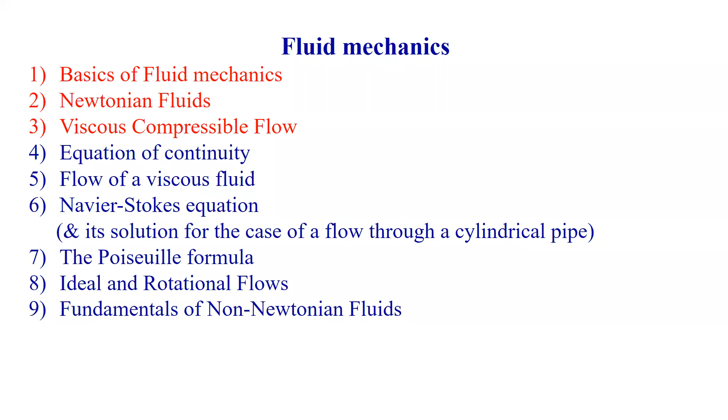What is fluid mechanics? What we discussed and came to a conclusion so far is that fluid mechanics deals with the study of all kinds of fluids under either static condition or dynamic situation. If we keep a fluid without motion, without movement, without pressure, or the forces acting on it from all directions conserved, the fluid is said to be static with reference to an observer, or it may be dynamic, moving from place to place, from time to time.

But fluid mechanics is a real branch of continuous mechanics. Continuous in the sense that properties are changing, dealing with the relationship between different forces acting on the fluid, different motion of the fluids because of various forces acting on it, and static conditions in a continuous material.

It also deals with, or refers to, many diversified problems such as surface tension, fluid statics - static in the sense it is not moving with reference to time, not moving with reference to the flow - flow in enclosed bodies or flow around bodies, either solid or otherwise, whichever shape you can expect under flow stability.

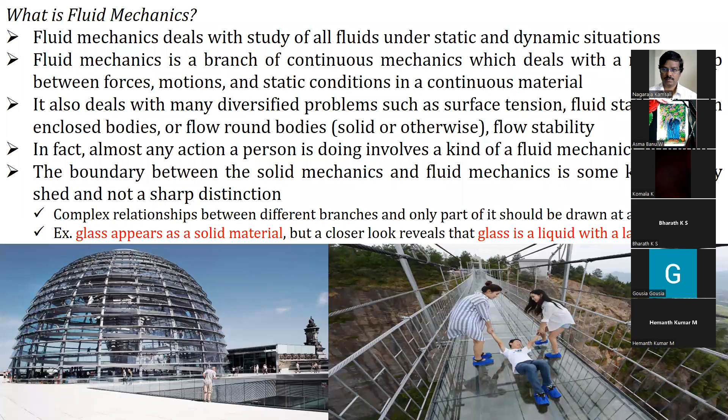A person was unable to move on that glass, afraid that he might fall. Even vehicles like cars and two-wheelers of known strength move on this, and this glass withstands that pressure and force at a great height of more than 500 meters, or a few hundred meters from the surface.

You may have watched this in a video or some social media, or heard that glass can be used as the toughest material. But glass is not an easy job to understand.

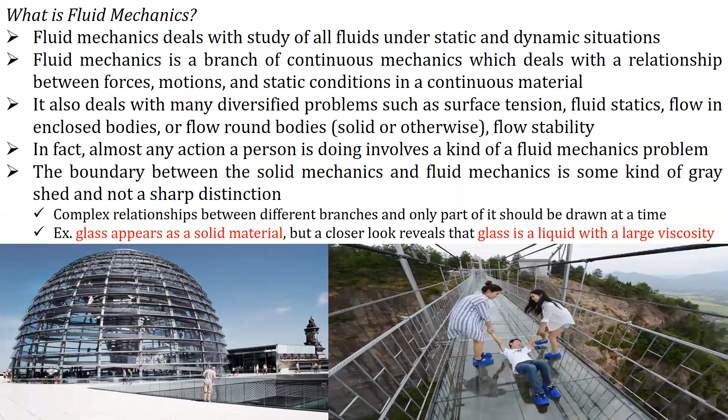How does glass behave, either as a liquid or a solid? There are several materials whose properties can't be understood by a fixed mechanism. Is glass a liquid? Yes, there is no doubt. At certain temperatures, glass behaves as a liquid.

Take the glass to a higher temperature and it converts to liquid, and by blowing that liquid you can make it into any desired shape of solid glass. The right path shows that glass is not a transparent material like an ice cube.

The right side picture shows the material of glass, solid glass. On the left side, it can take any shape - it is not simply deformed, but glass can take any shape through its deformation.

Pictures are better for understanding, but at the same time these may be complicated issues - it's not an easy job. The study of these mechanics involves many fields that have no clear boundaries between them.

You can take any examples or applications, entering any field, starting from the blood in a vessel to the plasmas in stars. You have to understand the relationship between fluid mechanics and their branches.

Researchers, scientists, and students at various levels classify flows into an orderly flow and a chaotic flow. If the flow is very orderly and systematic, it is called laminar flow. If the flow is not orderly, we call it turbulent flow.

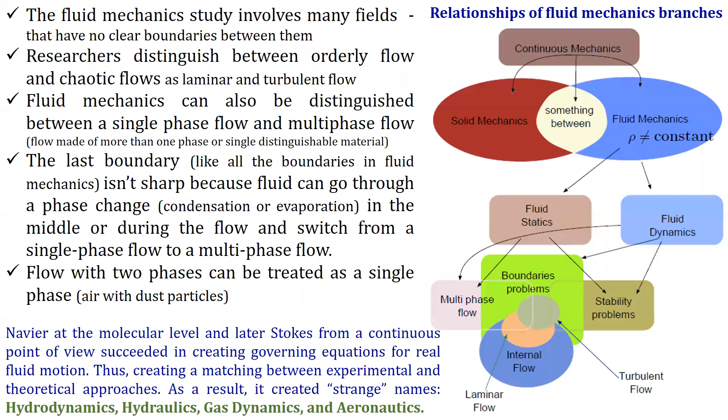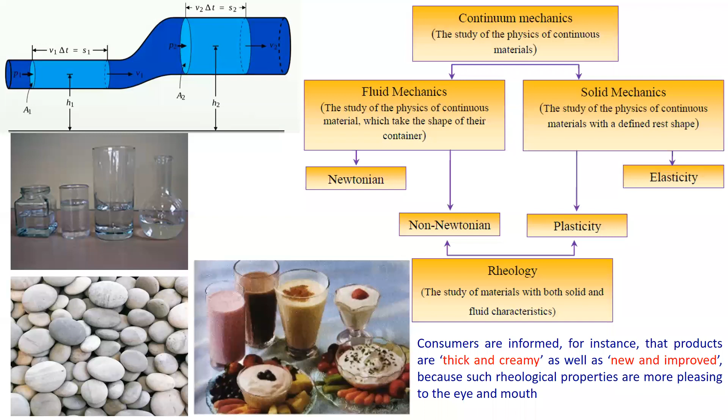There are several kinds of fluids, just going through that, don't worry, it's not an issue. Some differentiate fluid from solid by the reaction to stress. If you apply a stress and it gets deformed, it is a fluid, if not, it is a solid.

It is a known fact that fluid continuously and permanently deforms under shear stress, while solid exhibits a finite deformation. Of course, if you apply huge pressure, there may be some finite change that does not change with time. For example, if you have a cork ball, if you apply so much huge pressure, certainly it may change its shape.

It is also said that fluids cannot return to their original state after deformation, you may deform the fluid, but it will not come back to the original position, unlike plastics or elastic material. Maybe you have an eraser with you, you just press the rubber body and it will regain its shape. This differentiation creates a new material group that shows dual behavior, like particle behavior and wave behavior for electromagnetic radiation. This material will also show dual behavior under certain conditions, behaving like a solid in some cases, and like a fluid to a great extent in others.

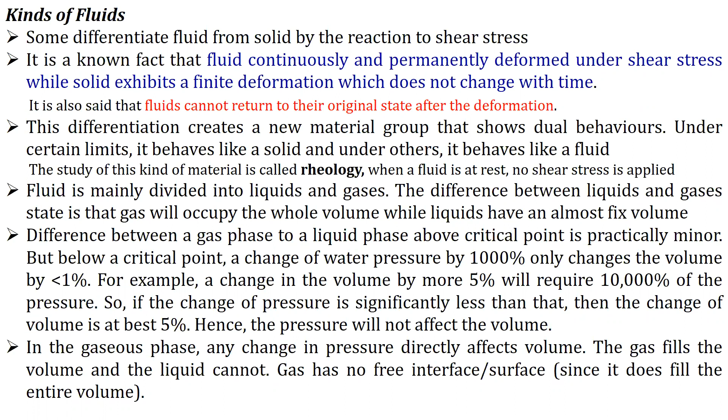In the gaseous phase, any change in pressure, even a small change, directly affects the volume. The gas fills the volume and the liquid can't fill the volume. Gas has no free surface or interface, but it does fill the entire volume, while the liquid will fill that. That's why fluids matter.

You might have witnessed it, or maybe heard, that people are walking on water, walking on a lake, walking on the ocean, walking on the seashore. On the seashore, there's no point on sand — people are walking somewhere else. That I will let you know in the next few classes.

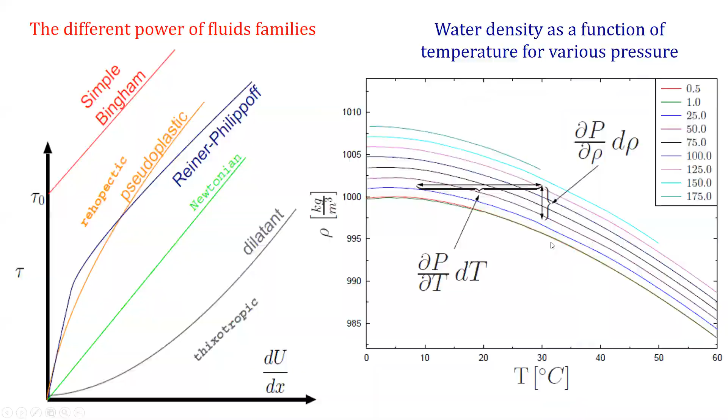Here you can't expect it to be almost linear, but you see how much gradient is expected. You also come across material with surface tension, which mainly depends on the properties of cohesion and adhesion. Cohesion means there should be an intermolecular attraction between the molecules of the same liquid — it enables a liquid to resist small amounts of stress. This cohesion is the tendency of the liquid to remain as one assemblage of particles.

Surface tension is due to the cohesion between the particles at the free surface. For example, if you take a capillary tube and dip it in water, the water rises on its own because of the surface tension.

But the liquid will never adhere to the substance in such a way. Adhesion means attraction between the molecules of the liquid and a solid boundary surface in contact with the liquid. This property enables a liquid to stick to the body.

Capillary action is due to both cohesion and adhesion, but it may not adhere. Surface tension is mainly caused by the force of cohesion at the free surface. A liquid molecule in the interior of the liquid mass is surrounded by other molecules all around.

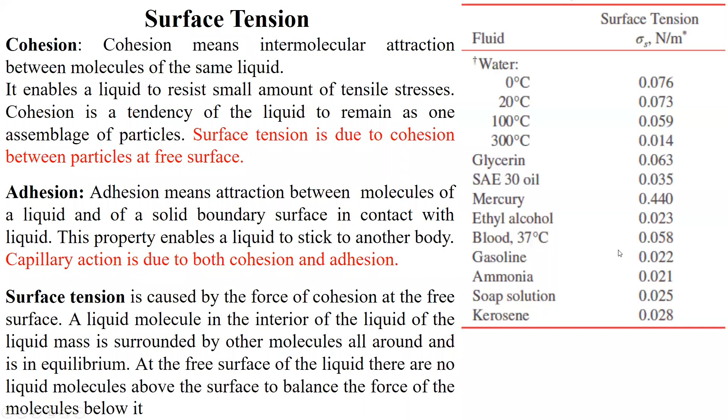Regarding fluid and surface tension, water has a different surface tension, and it is a function of temperature. Glycerin has some value, oil has something, mercury has something, kerosene has something - these values are only for your reference.

Because of this, there exist different types of flow. You can classify them as compressible and incompressible flows. Liquids are not compressible, gases are compressible. An incompressible flow is one where variation of density within the flow can be neglected - if the rate of change of density with time occurs, it's compressible; if not, it's incompressible.

Flow can also be classified as either steady or unsteady. A steady flow is one in which velocity does not depend on time - it moves constantly. When velocity varies with respect to time, the flow is called unsteady.

Here, something is falling - is it laminar? No. You can classify flows as laminar and turbulent. This here is a laminar flow. Flow of ink in a refill is a laminar flow, while flow of gas molecules in the air is turbulent.

Flow of falling water - you might think it's not turbulent, it looks like a laminar flow at first. But see here, it is not like that - it is a turbulent flow, mixing with the rest of it.

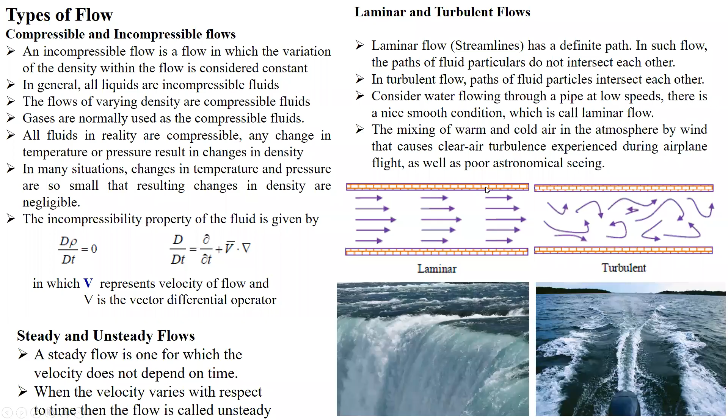Just read this for understanding. Based on these properties, fluids can be classified into ideal fluids - this is the line which is incompressible and has no viscosity.

All fluids have some viscosity - ideally, no fluid exists without viscosity. Real fluids are the ones which possess viscosity, known as real fluids. All fluids in actual practice are real fluids - you can't expect an ideal fluid.

Newtonian fluids have to obey the Newtonian law. Ideal fluid is at zero, ideal solid is on the y-axis, and ideal fluid is on the x-axis. Newtonian fluid and non-Newtonian fluids - this is a non-Newtonian fluid of that kind.

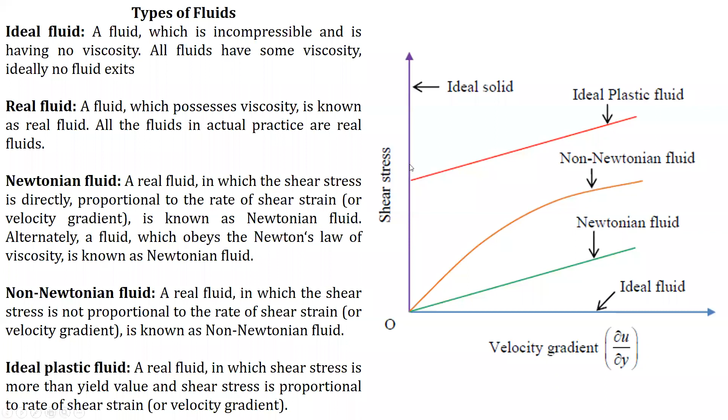If it is an ideal plastic, even with del u by del y equal to zero, it has to have some shear stress - that's an ideal plastic fluid of that kind. Because of that, we get the rheogram of various fluids, where rate of change of velocity with distance gives you the stress.

These are some properties one has to understand. Based on that, Navier and Stokes have developed a set of equations that should be well understood by different research communities and also by the curricula to a great extent.